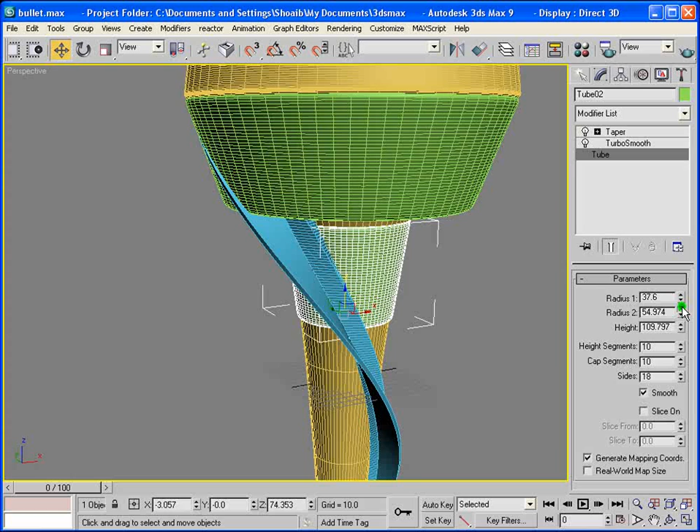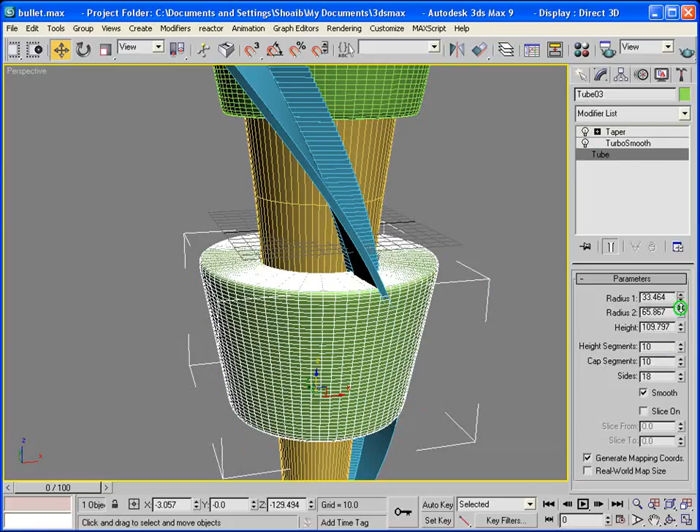The size a little bit, radius, make it bigger, and again just hold Shift and bring it down like another copy. Keep on saving your project as well, and we come down to tube again and we just reduce, keep on reducing until we get the desired scale.

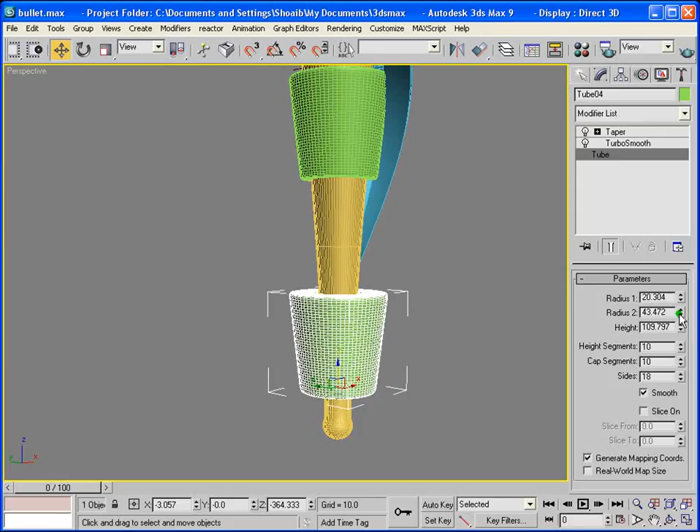So now you can also see that the file size is getting heavier and heavier. Again, do the Shift thing and say okay, and we just go back to tube and we reduce the size. So if your file size is getting heavier, what you need to do is just turn it down to 5, and turn this one down to, it depends on your machine as well, segments, height segments and cap segments, otherwise your computer might crash. Okay, and leave the big one as it is and do the small ones.

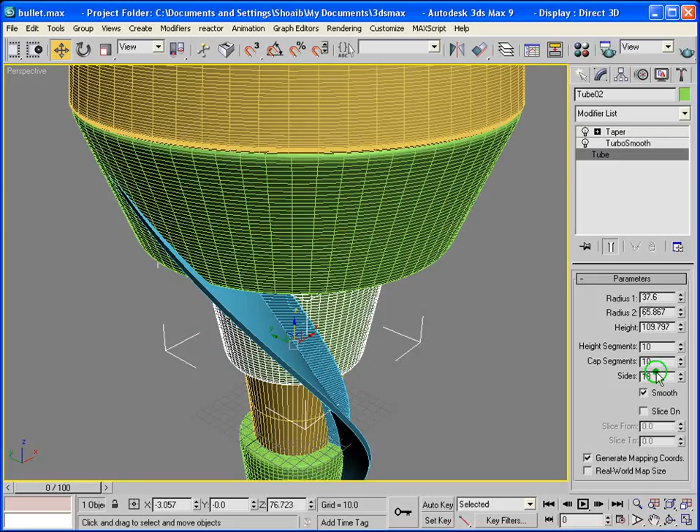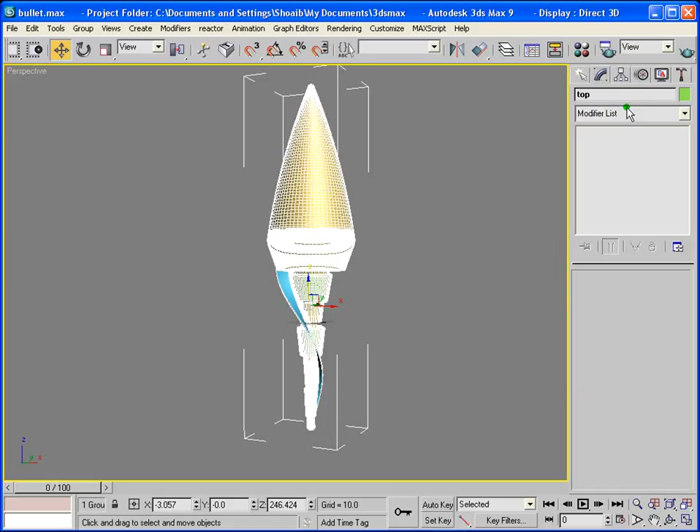Right, so now that we've got our main spear, top bit is done. Right, save it, and we just select all of it and we say group and we call it top. Right, and let's just apply one material to see how it looks, one color, just get a taste of it. So far so good, that looks alright. You can also just change this to metal for now, and then just see, you're getting there already. So we've got our top bit.

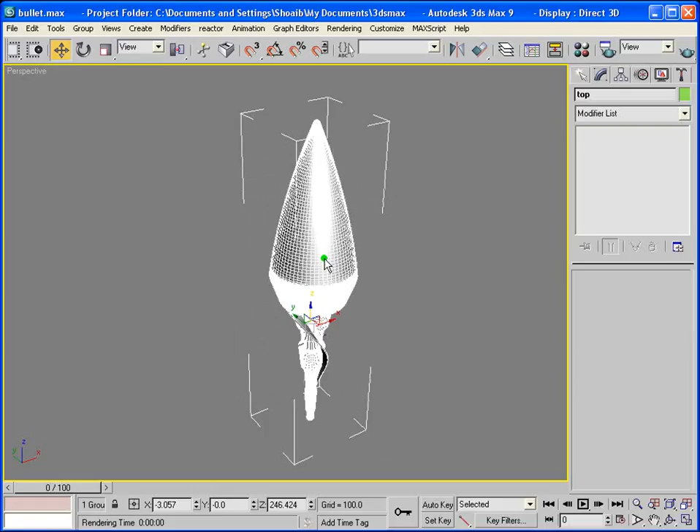Well, how are you going to go back into the sub elements, into this? So you don't need to ungroup it. What you do is group and open. So it's still grouped, but it lets you select all the inside bits. So what you can do is turn off turbo smooth here as well, because you don't want your file to be heavy, and then go back to group and close. So you've got your basic spear.

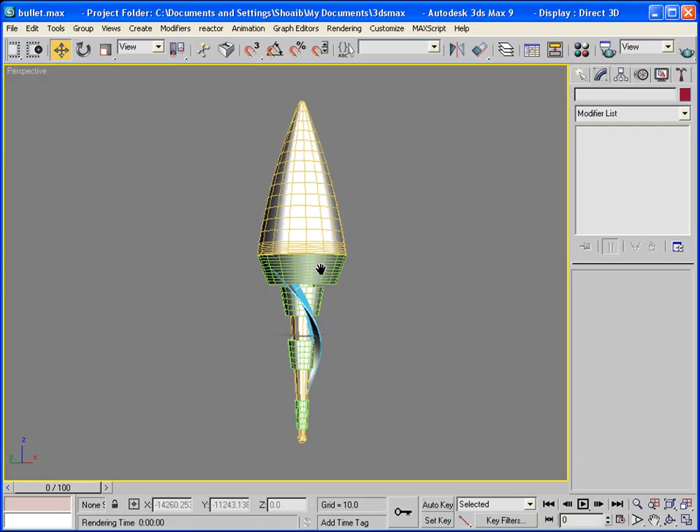Now next step is we just go back and we say right click and we say unhide by name, and now you want the middle bit, say unhide. Now as you can see, the middle bit is the whole tube. What we need to do is, again, we need to show our background map so that we at least know from where we have to break it. So select the middle piece, and again same method, edit poly, and in edit poly we go to polygon mode, which you can always select from here as well.

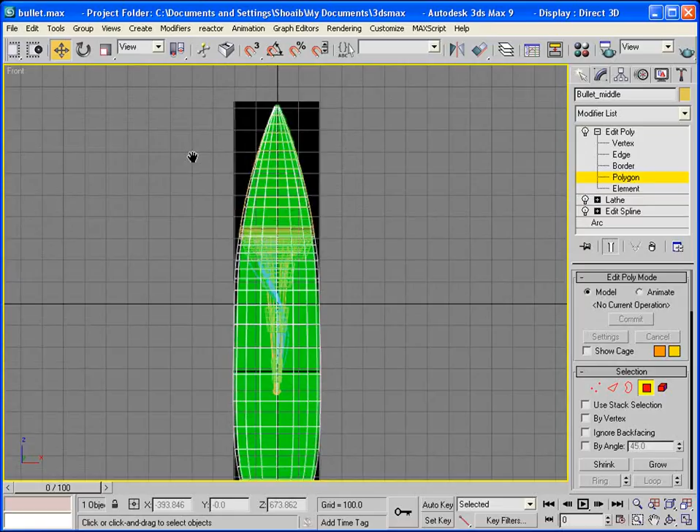And now you remember that you need to break it from here, and from the top you have to see where your spear ends. I think that was from here. Right, you can go and check from here. You can move it up and down, but don't move too much. Come out of it and select and move up and down. Okay, you have broken it at the right place. So Control Z. For now we're not going to move it, just leave it as it is.

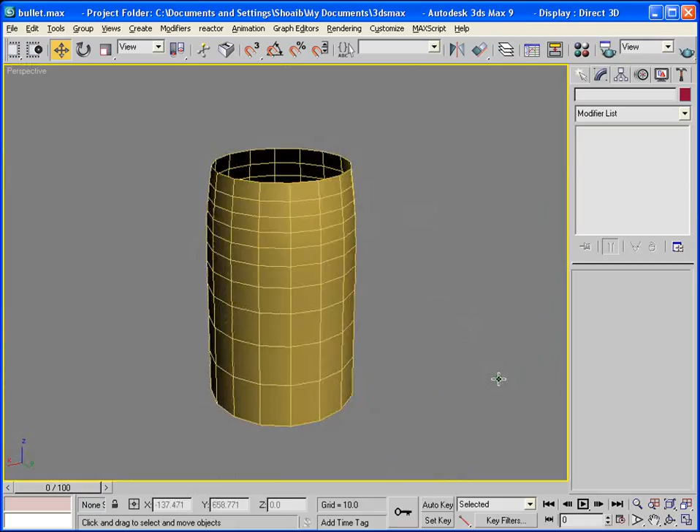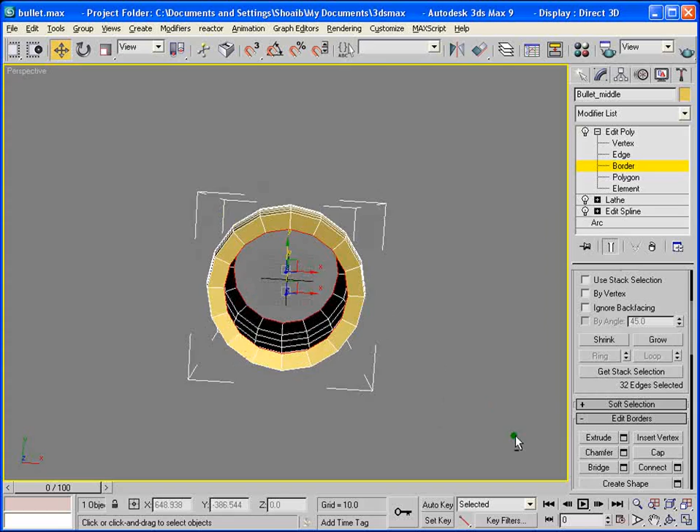Hide our background, and we hide this. Right click and hide selection. Now we'll be working with this one only. Right, so again the same method. What we do is you go to border, select border here and select border here, and then you just go and extrude it inside, extrude it inwards like you did before, and say okay. Since the borders are still selected, you can see it's a bit empty from inside.

There's a cool technique here, and it's called bridge. What you need to do is just bridge it. So as you can see, that has bridged. If you want more segments in the bridge, you just go to bridge and then you say segments. Now, since we don't need too many segments because inside it's going to be like that, let's apply 3 or 4 segments and say okay.

Now next thing is, of course, apply the same turbo smooth. If you don't have turbo smooth, you just apply mesh smooth, or you've got to apply something. Okay, again it looks like a tire, which is again not what we want. So we go back, turn this off, and we'll do the same method here.

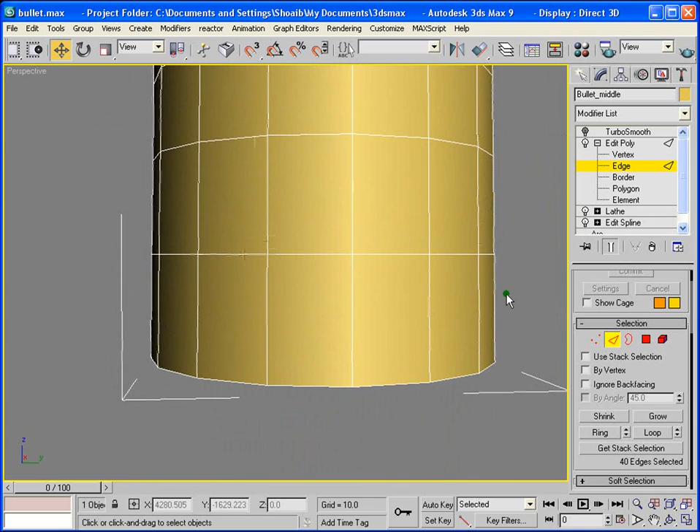We just go to edge mode, and we select the edges here, and come down, hold down Control on your keyboard and leave it there. Make sure that you selected everything, otherwise sometimes it doesn't select. See, you've got a problem here, big time. See, this is what I was talking about. So you make sure that you select the ones that need to be selected, which is this one.

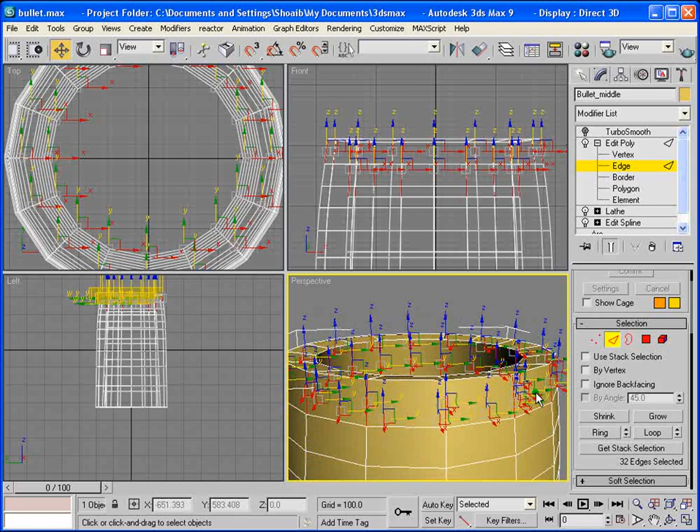So you can click Ring, but the problem is it doesn't select from inside. So for that, you go back to the top viewport and make sure that you select all these here. Now selected, nice. So probably the inside ones are a bit bigger, that's why they are selected like that, but never mind. The main thing, we just apply again the Connect, and we just apply, let's say 5, right? And again we just select this one here and we say Ring, and we've got it there.

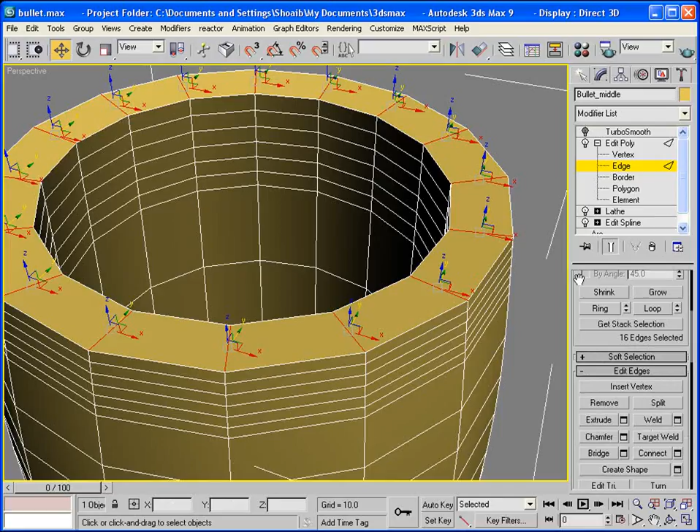Basically what we want is we need to get rid of that soft bevel effect. So for that we have to put more edges here. So we just go to Connect again. So we've got these segments here, say OK, and now we select the main one that we need to chamfer like we did before. You need to of course Loop, select all around, and then, like we did before, come here and we say Chamfer, and again 1, it's applied, and then we apply again, and this time 0.5. So now we've got a nice looking edge. Look at that, beautiful.

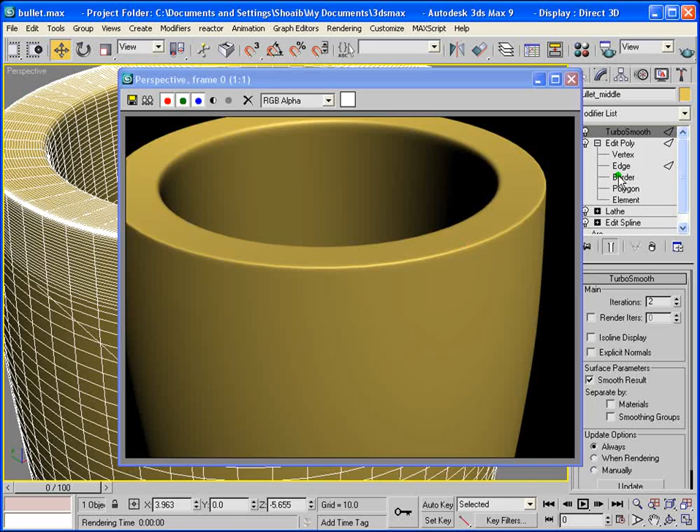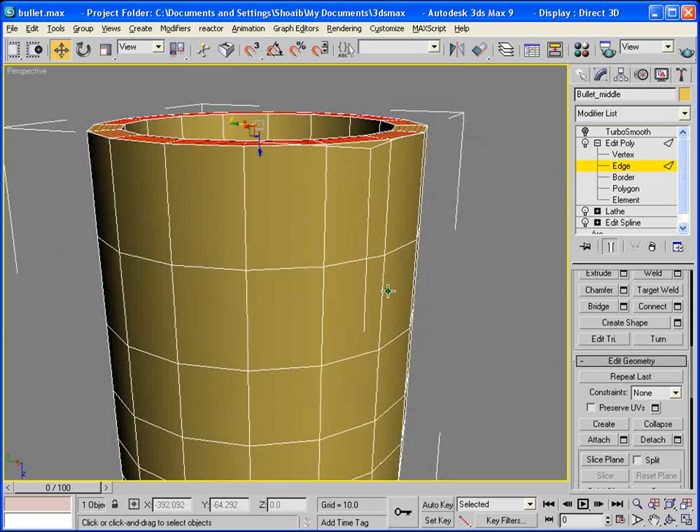So the same method we'll do here. You could have done it in one go, but I just wanted to do it the easy way. Okay, we do the same thing. We'll select this one and we'll just go and say Ring. It'll select all of that, and again Connect. So you've got already segments there, 5. So say OK. Then of course let's select here as well, the same method, nothing new.

I hope you're following and enjoying as well. Okay, of course you can stop and play the tutorial according to your understanding. Say OK. Since there's no forward and rewind button, what you need to do is just scrub the timeline manually to get to the point where you want to be.

Okay, select this edge here again, and then we'll go up and we say Loop, and again we'll apply Chamfer the same way that we did before. Say 1, Enter, and again apply 0.5, Enter, and OK. So now if you go, you'll see again the same thing on both sides.

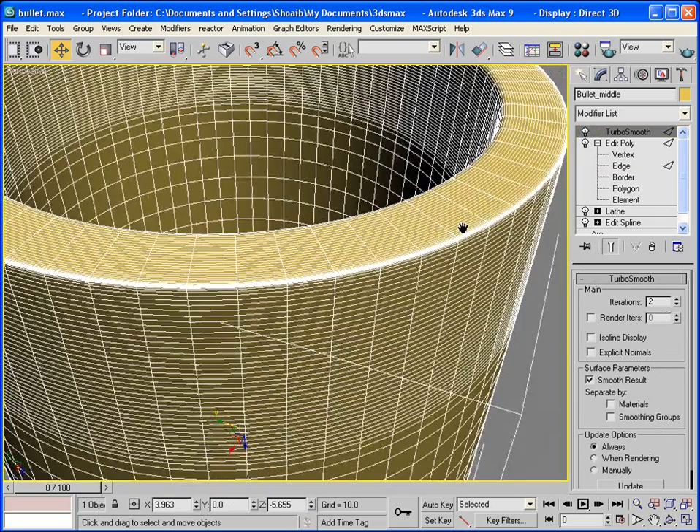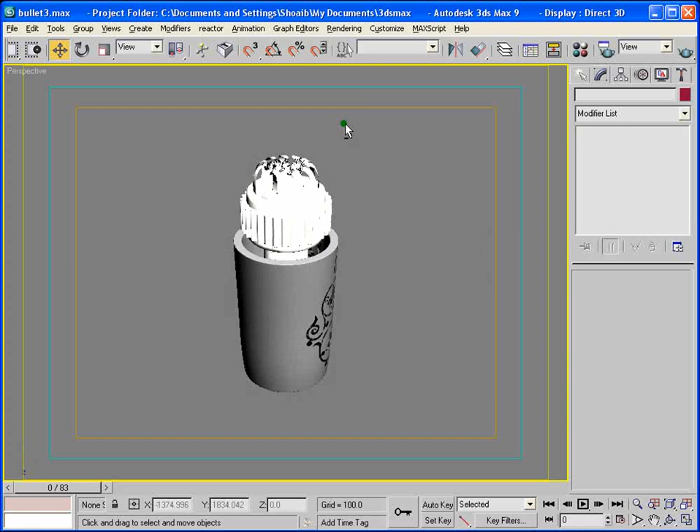What we need to do next is make the inside of the middle part. For that we need to see the Photoshop file. As you can see, this one opens, and then there's a whole lot of machinery going on inside. I'm not exactly sure what it is, but I've kind of made something that you can see in my file. So basically this is what we'll be making now. As you can see, there's some kind of machinery that I came up with since we don't have the proper sketch. So we'll be making this one, not very difficult, very easy.

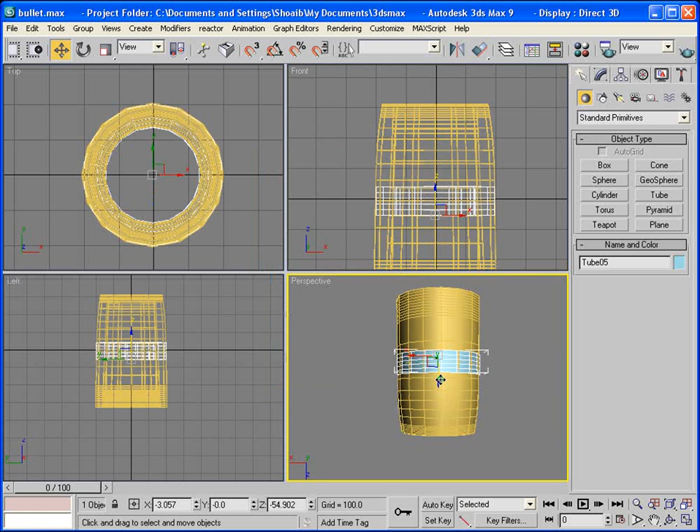So let's go back to our file, very quickly make a tube again. So it's still in there, align it the way we did before, and we bring it down here. It's upside down actually, so we have to bring it down here, and we increase the height. It has to be inside it, so let's reduce, change this into TurboSmooth as well, so we get this nice effect again.

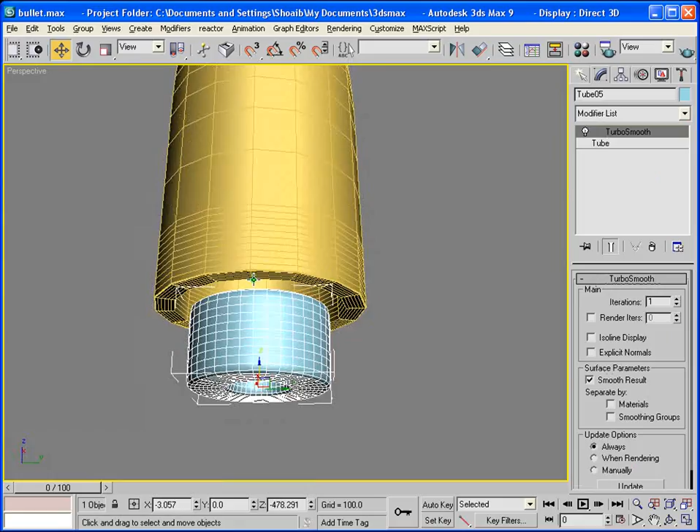The next step is we can add another material to it, which is we can add the same tube by pressing Shift and clicking on it and say tube, say OK. So now you go back to the tube and just reduce the size and increase the height.

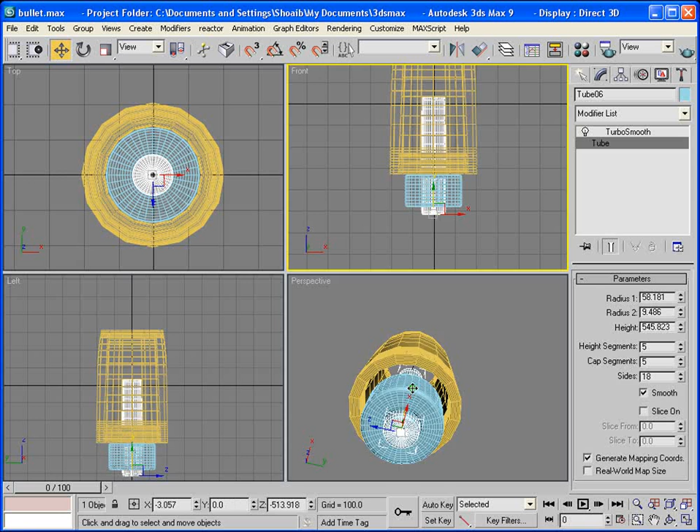So it's coming out from here a little bit, and the rest is inside. Keep the turbo smooth to 1. So now let's go and make the machinery. Save your project as well.

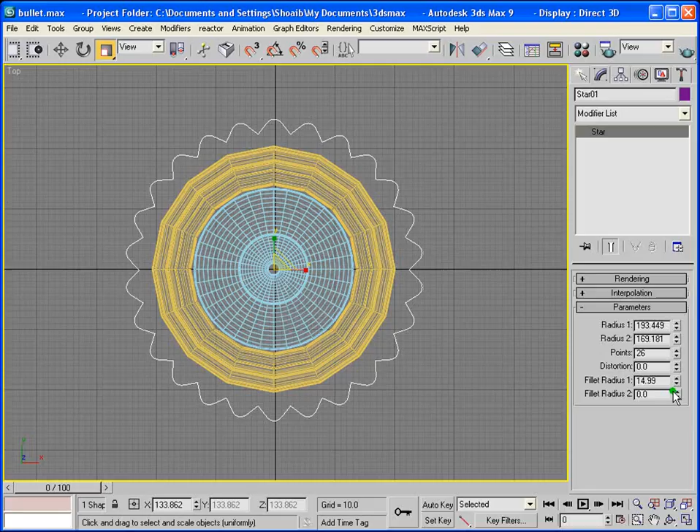Okay, now what we do is we add another element, which is like a star, a cog, and we just come here, and you can also scale it from here. This is also a scale tool, and we just change the fillet radius so that we get these edges. So let's bevel it and see how it looks. So it's been beveled. And change the height to 1.

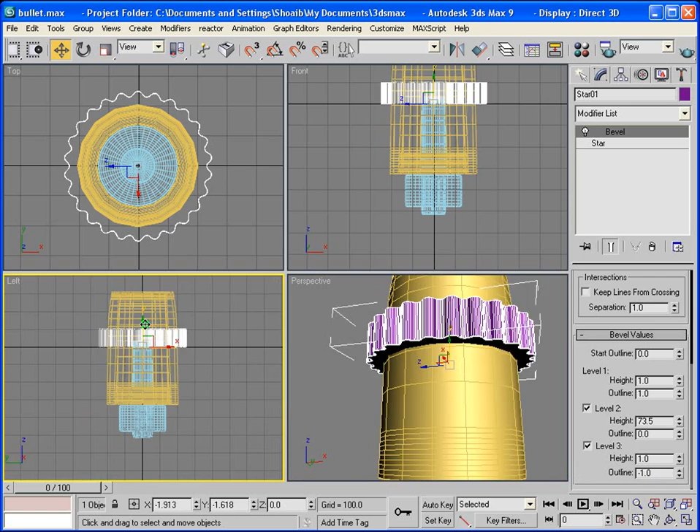If you have done my tutorial of text explosion, you should know what I'm doing here. So now we've got our star, and make sure that it's inside and touching the edges. Let's increase the bevel a little bit more. Bring it in the middle. So that looks alright now. We can reduce the size here a little bit, and increase again the height so it covers it.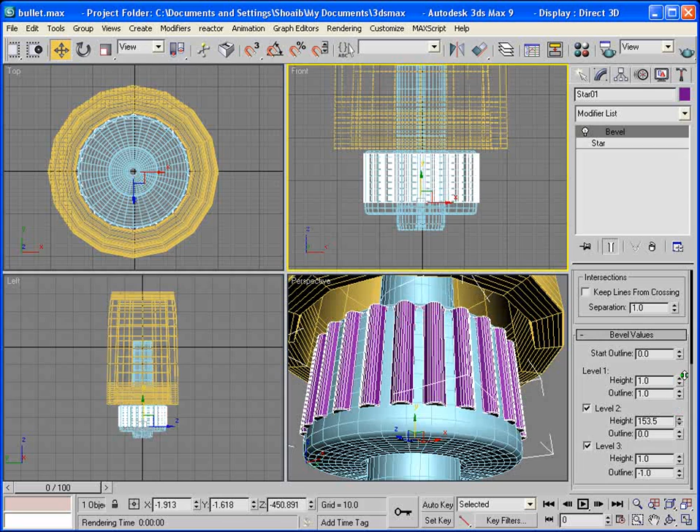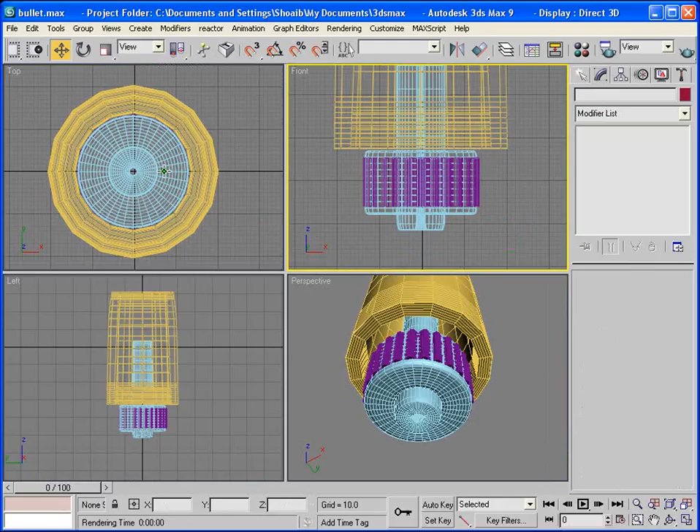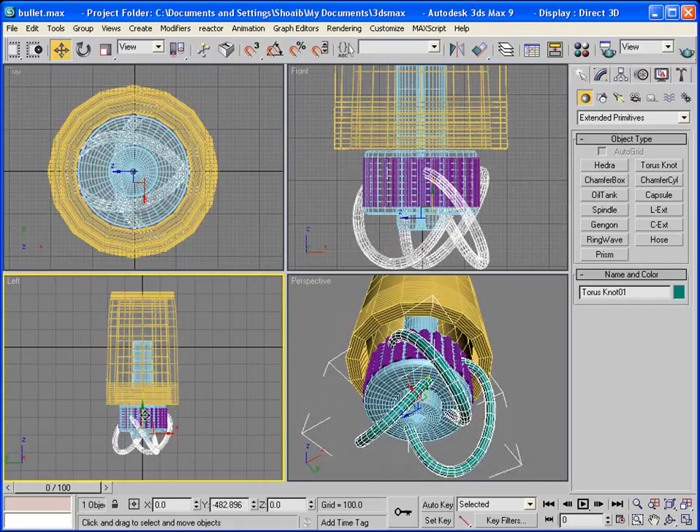So we've made this part as well, and now the next part is just something I came up with, with torus knot. I was playing around and I thought, okay, this looks cool, so I designed this. Now we go to geometry, and in geometry we go to extended primitives and torus knot, and you go to the top viewport and apply our torus, and again we just align it with the main body. Say okay, and then you just bring it down here, and I just play around and see what happens.

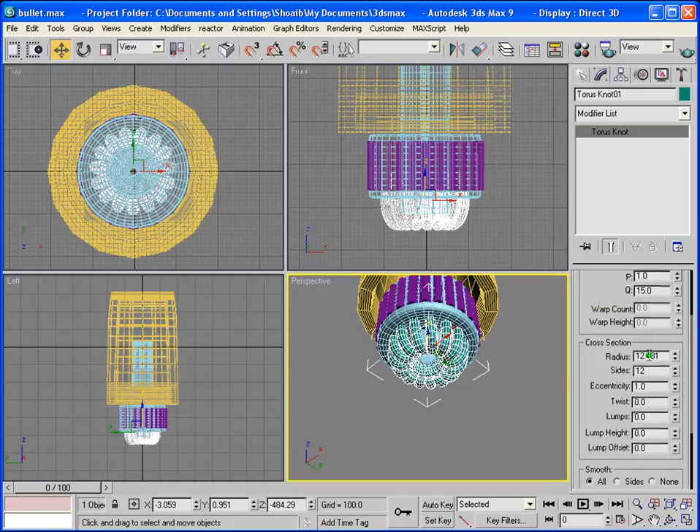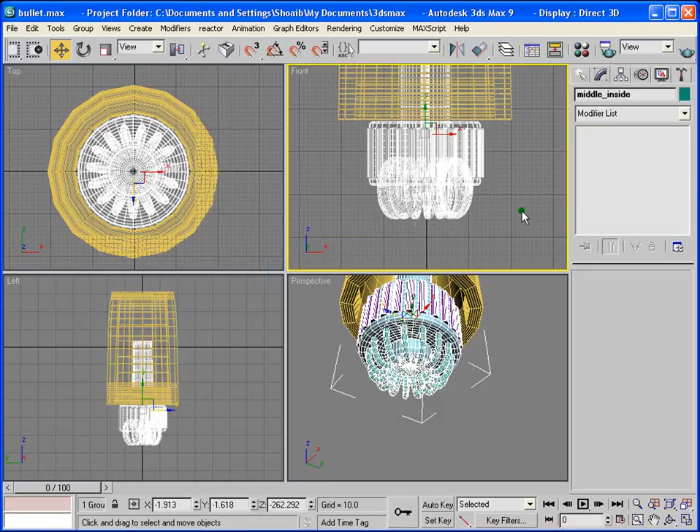We select all this, we say group, and we say middle inside. Okay, and we just select all, and again, something's selected here, so you go back and just click outside, turn on, and you say group, and you say middle. So we have finally made our middle as well. Not difficult at all, I guess. I hope you guys are following me. It's just a bit tricky sometimes, but I'm sure you understand everything.

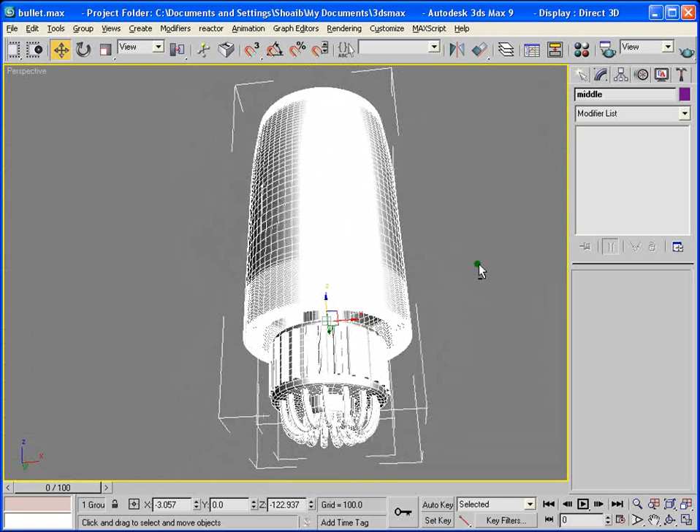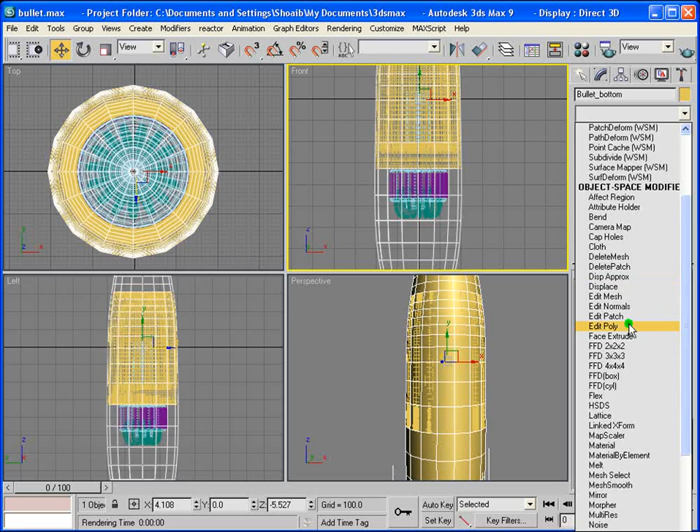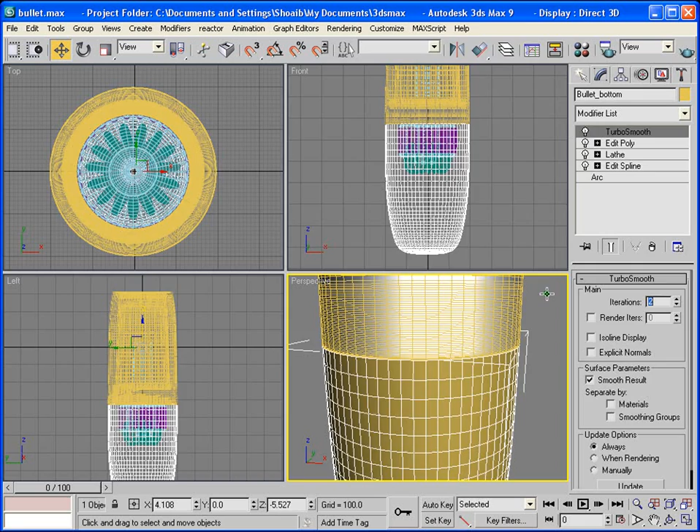Right, now the next step is that we will unhide by name again the bottom bit. So this is the bottom bit. So we again change it to edit poly, and in edit poly we select the polygon, and as you can see, we have to delete one more. Fortunately you don't have to do much here. Okay, and again we change this into turbo smooth. Here it is. Right, so we hide selected, and you can see we need to give it a thickness.

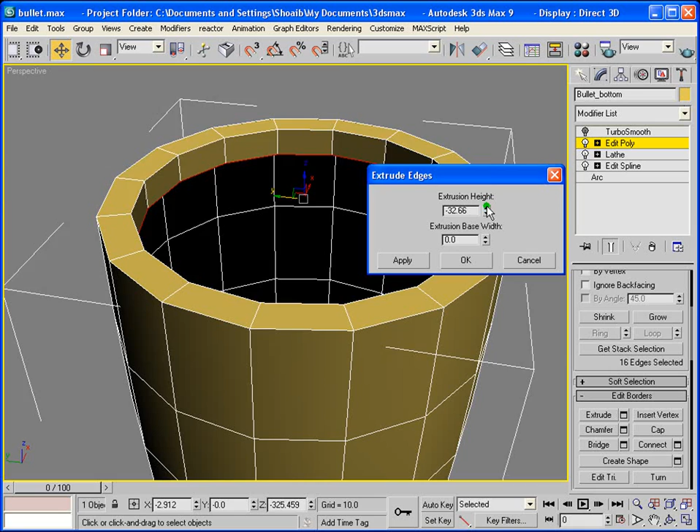We just go back to our border here, and we just apply extrude, and the same thing. When you apply again, it goes down. You just need to give it an effect. So you just leave it as it is. Extrude it down. We don't need to put it too far down, so we just leave it there somewhere.

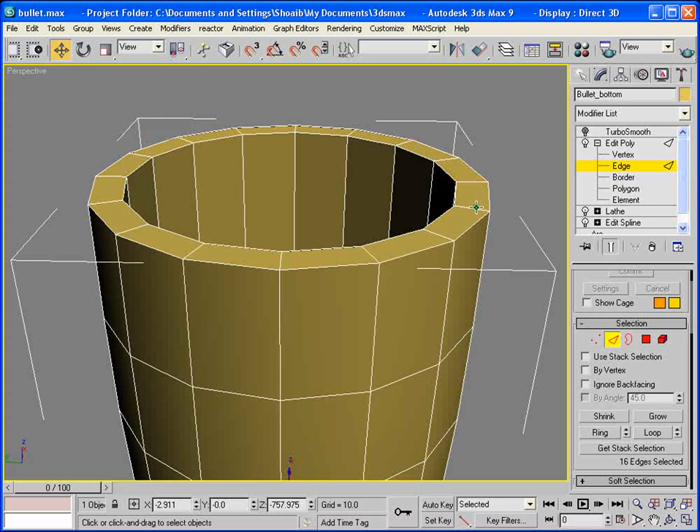And again we'll select the middle one, which is important, and we say loop. Again, go through the same process, chamfering it. Say 1. Make sure that you chamfer with